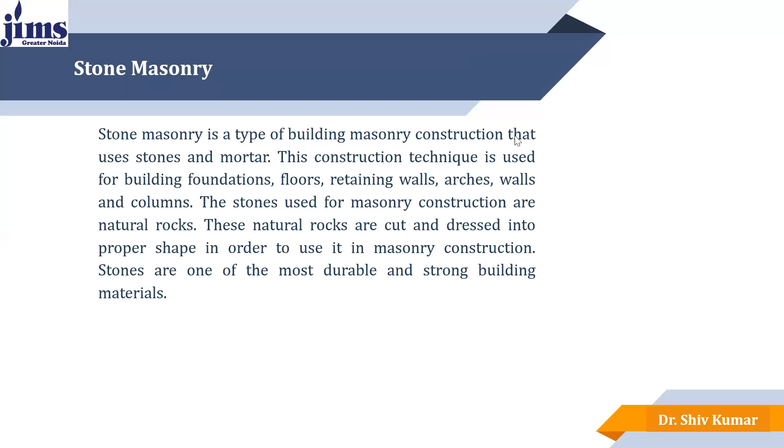Now let's talk about the types of material used in stone masonry. There are two types of material which we use. The first one is the stone. Generally we use limestone, sandstone, granite, marble, and laterite for stone masonry. Sometimes we use river pebbles, which are rounded in shape and used for aesthetic purpose only, not for strength.

The stone used for masonry construction must be hard, tough, and free from cracks, holes, cavities, and other types of defects.

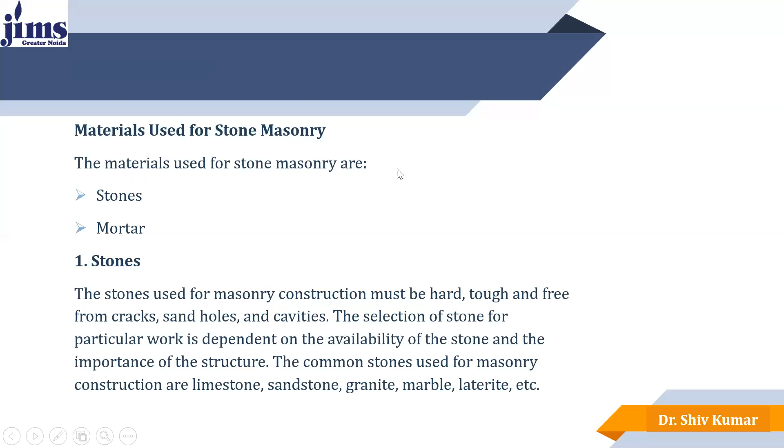Next is the mortar. The mortar is a binding material which is made by mixing sand and cement with each other along with water. The mix formed is uniform in nature.

The two main factors affecting the selection of mortar for masonry are, first, the strength required. Based on the strength required, we alter or vary the proportions of the mixtures like cement, sand, and water.

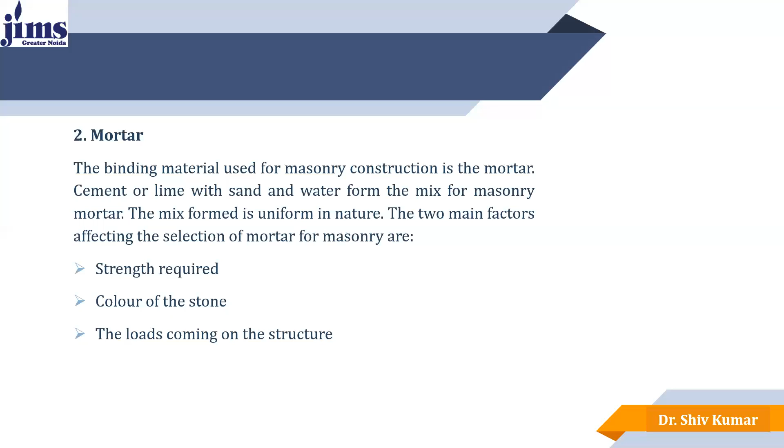Next is the color of stones. Suppose we are using white types of stone and we need colored mortar, then we should use some pigments that can change the color of mortar for that construction. The third factor is the loads coming on the structure. Based on all these three factors, the mortar's mixture can be decided.

Now come to the classification of stone masonry. There are two main classifications of stone masonry: the first is rubble masonry and the second is ashlar masonry.

Rubble masonry includes the type where stones employed are either undressed or roughly dressed. These masonry constructions do not have a uniform thickness. The strength of rubble masonry depends upon the quality of mortar used and the proper filling of mortar between the stones, spaces, and joints.

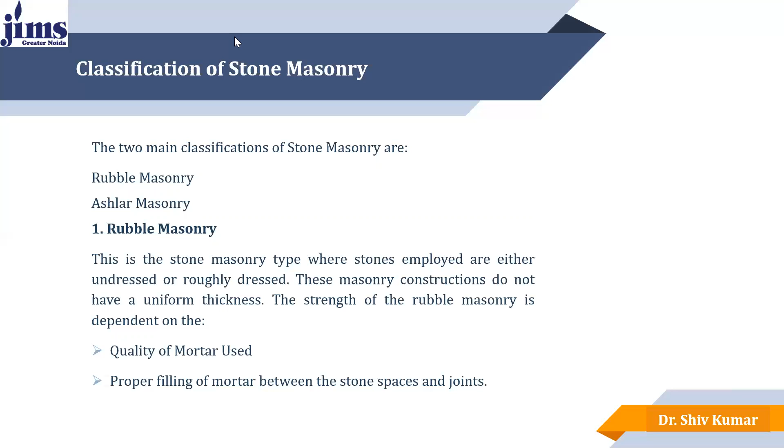The rubble masonry can be further classified into five types: the first is coursed rubble masonry, second is uncoursed rubble masonry, third is dry rubble masonry, fourth is polygonal masonry, and the last one is flint masonry.

In coursed rubble masonry, the stones in a particular course are of equal height. Course means the horizontal layer, a single layer of stones arranged horizontally in the same size and shape in a wall. The stones used possess different sizes in this type, and all the courses do not have the same height. This type is commonly employed in the construction of public buildings, abutments, residential buildings, and piers of ordinary bridges.

Here we can see the coursed rubble masonry in the figure provided at the right of the PPT. In the third figure, one course is shown in which multiple stones have been used in a single row, and then three courses have been shown in that.

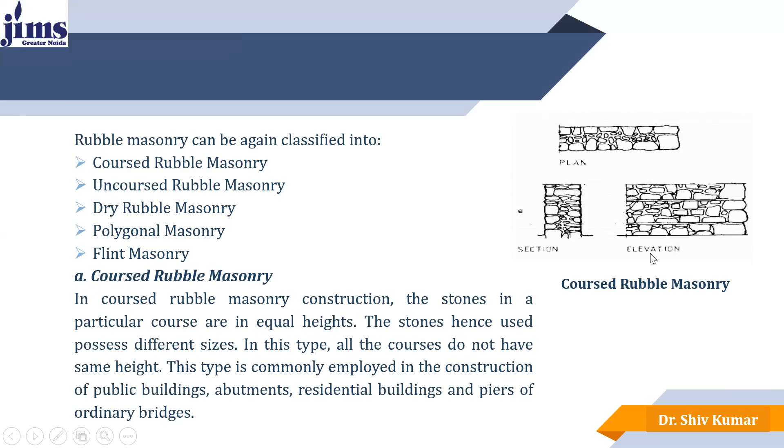The next type is uncoursed rubble masonry, which is the cheapest and roughest form of stone masonry construction. The stones are directly taken from the quarry, called undressed stone blocks. The course is not maintained regularly in this method of construction. Initially, larger stones are laid first, and then the spaces between them are filled with spalls, meaning small sized stones.

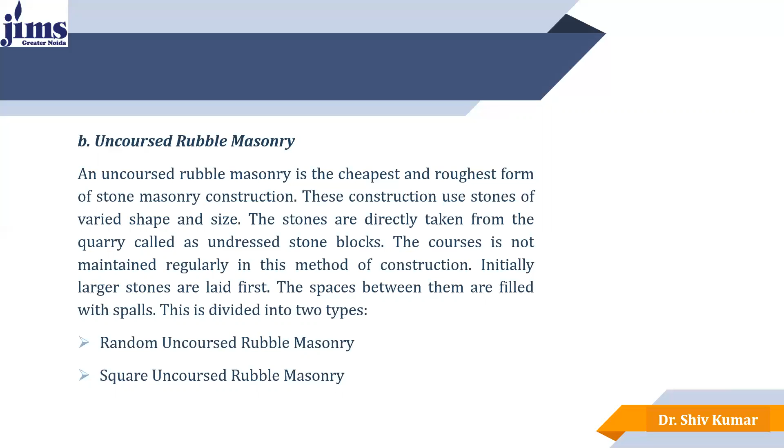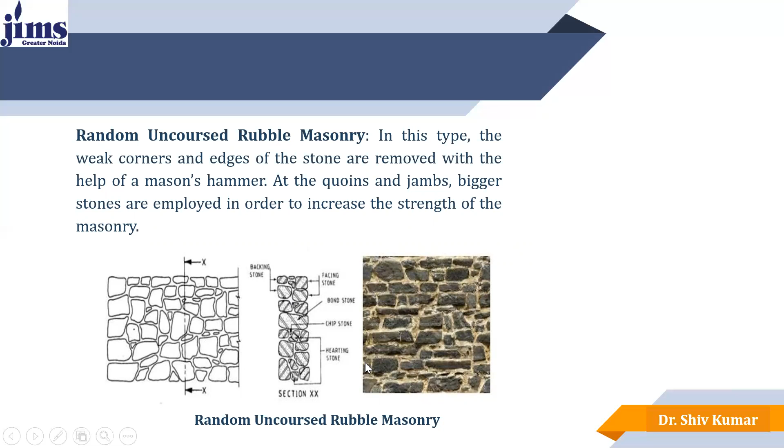In the colored figure, you can see the weak corners and edges of the stones are removed with the help of mason hammers. At the quoins and jambs, bigger stones are employed, as seen at the corner, with bigger joints provided. In the middle figure, the bigger stones are provided at the corners, known as quoins or jambs, just to increase the strength.

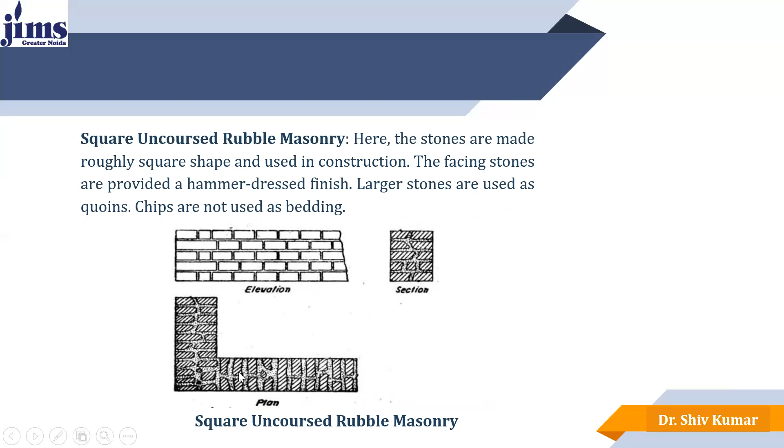The next is the polygonal rubble masonry. Here the stones for masonry are roughly shaped into irregular polygons. The stones are then arranged in such a way that it avoids vertical joints in the face work, breaking the joints as possible. Stone chips are used to support the stones.

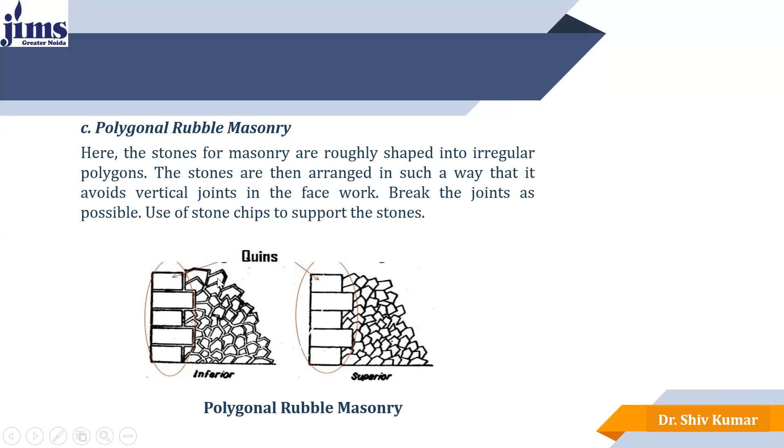We can see that the quoins are provided with bigger stones, and in the middle the polygonal stones have been provided in which there is no vertical joint. You can see the joints are there, but no vertical joints.

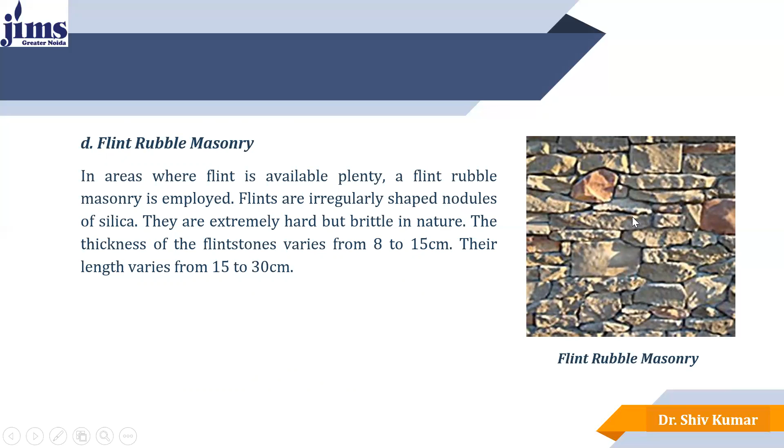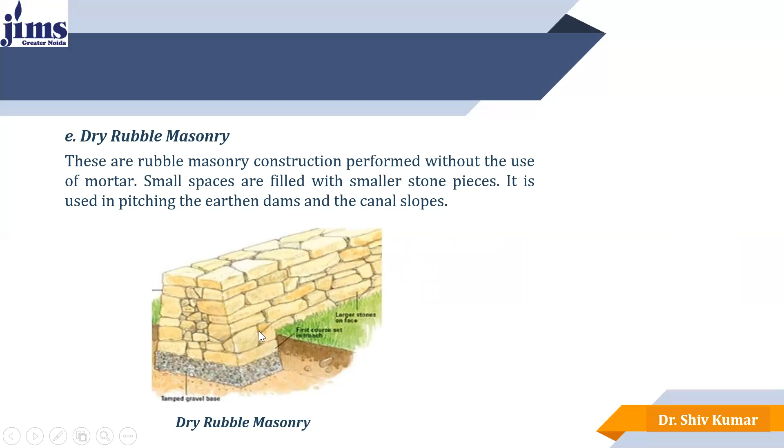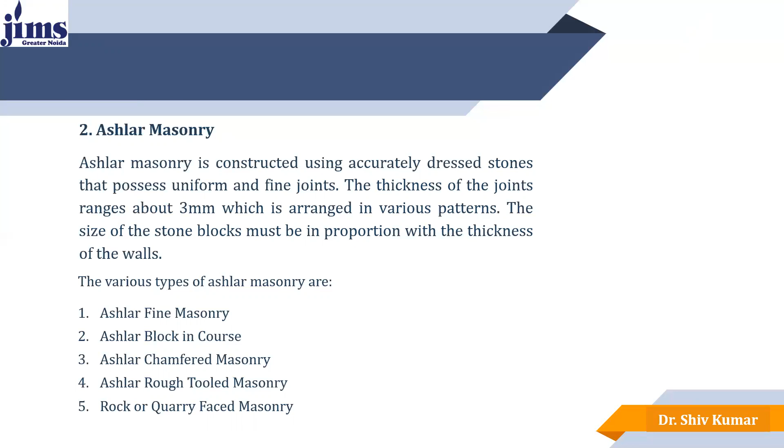The next is the ashlar masonry. It is constructed using accurately dressed stones that possess uniform shape and fine joints. The thickness of the joints is about 3 mm, arranged in various patterns. The size of stone blocks must be in proportion with the thickness of the wall. The various types of ashlar masonry are: ashlar fine masonry, ashlar block in course, ashlar chamfered masonry, ashlar rough tooled masonry, and rock or quarry faced masonry.

The first one is ashlar fine masonry. Here, each stone is cut into uniform size, shape, and almost rectangular form, having the shape like a brick. This shape provides perfect horizontal and vertical joints with the adjacent stone. Ashlar fine masonry construction is very costly because we have to spend more money just to maintain the shape and size of the stones.

Ashlar rough masonry is a type in which the stone's sides are finely chiseled and dressed manually. The face of the stone is made rough by means of tools. Around the perimeter of the rough dressed face of each stone, a strip of 25 mm width is provided.

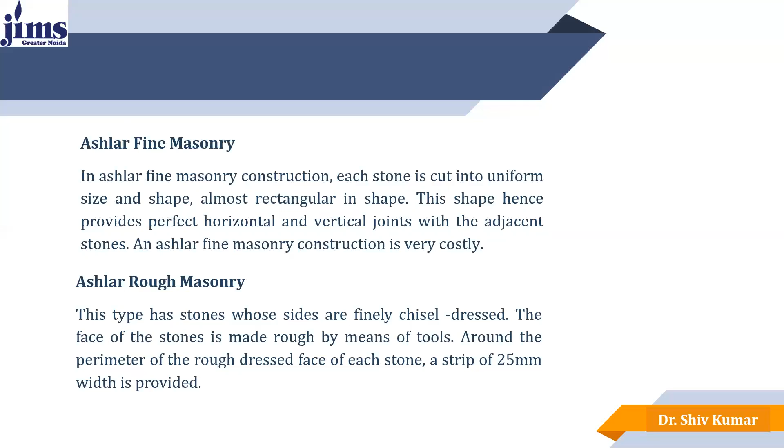Here we can see that ashlar fine masonry is perfectly fine, like brick masonry. And this is the ashlar rough, where on the face of the wall you can find the roughness of the stone.

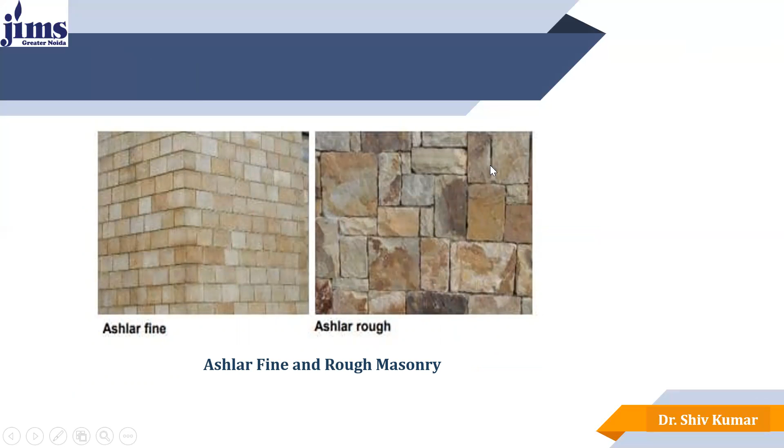The next is rock and quarry faced masonry. This type has a 25 mm wide strip made by chisel placed around the perimeter of every stone. The remaining portion of the face is left in the same form as it is received.

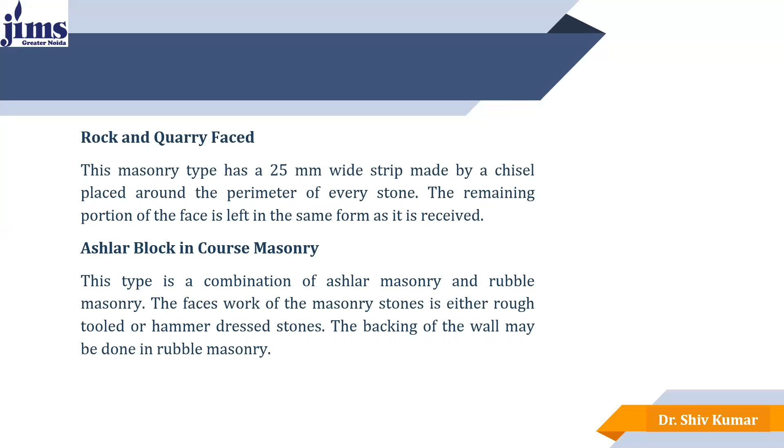Ashlar block in course masonry is a combination of ashlar masonry and rubble masonry. The face work of the masonry stone is either rough tooled or hammer dressed, while the backing of the wall may be done in rubble masonry. Here we see the combination: first is ashlar rock or quarry faced, and second is ashlar block in course.

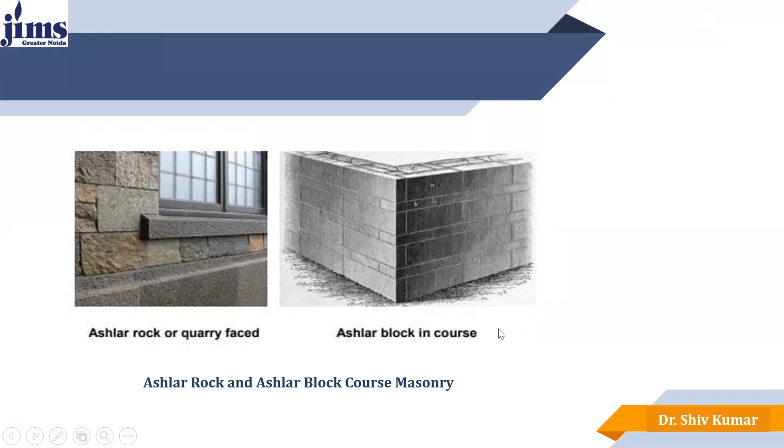This is almost the last type of ashlar masonry: the ashlar chamfered masonry. A strip is provided as shown in the figure, but the sides are chamfered or beveled at an angle of 45 degrees by means of a chisel at a depth of 25 mm.

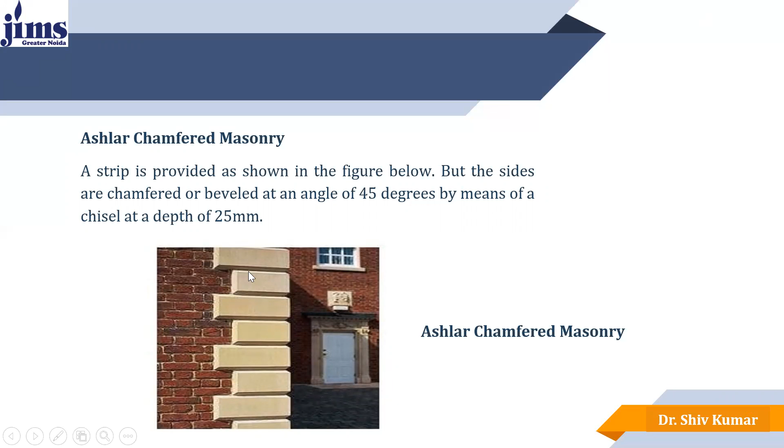Here you can see the stone which has been laid. The difference between the stones is 25 mm, and the upper edge is slightly tooled at an angle of 45 degrees on all sides. This is called the beveled angle.